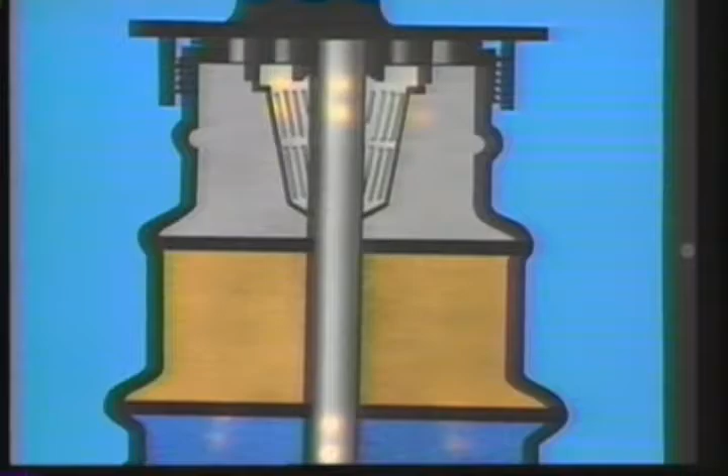Introducing Holy Water, the ultimate drinking water appliance. Holy Water is affordable, easy to install. This multimedia filter system is guaranteed for 6 years with no filter change.

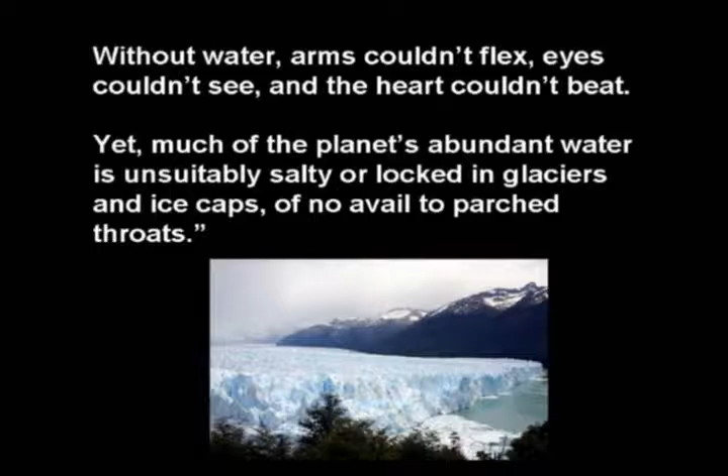In enacting the Safe Drinking Water Act in 1974, Congress envisioned a major overhaul of the nation's drinking water supply system. By all accounts, that vision has failed. The EPA ranks drinking water pollution as one of the top 4 environmental threats to health.

1 in 6 people drink water with excessive amounts of lead, a heavy metal that impairs children's IQ and attention span. In the early summer, half the rivers and streams in America's Corn Belt are laced with unhealthy levels of pesticides. Microbes in tap water may be responsible for 1 in 3 cases of all gastrointestinal illnesses. Ironically, even the chlorine widely used to disinfect water produces carcinogenic traces when combined with other common substances in water.

The ongoing problem of tainted drinking water is very disturbing. It is complicated by the varying standards and expectations of drinking water. The delicate ecosystem called Mother Earth contains a fixed amount of water, the very source of life itself.

So the next time you take a moment to drink a refreshing glass of water, keep this in mind. All of the water there ever was is still with us today. Water is alive, cycled and recycled in an incredible and never-ending self-cleaning process.

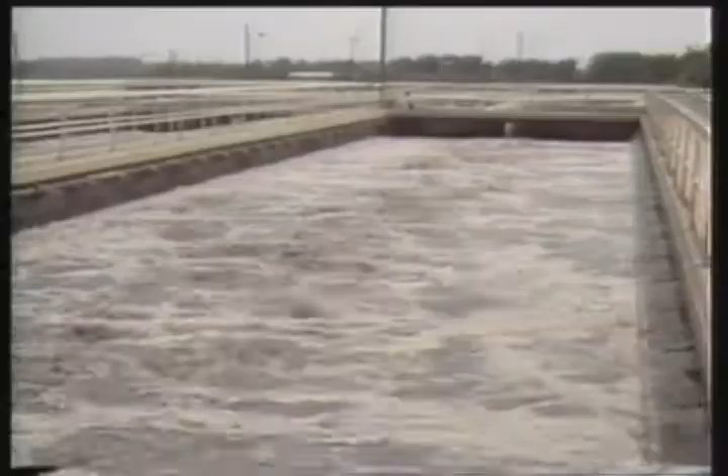A natural process which is now being stressed to unnatural limits due to increasing agricultural runoff, industrial pollutants, inadequate sewage treatment facilities, and deteriorating pipes and fittings.

First falling as rain, water circulates throughout the Earth's surface as rivers, streams, lakes, and oceans. Water flow generates electrical power and forms natural superhighways for transportation while functioning as the nation's collective sewage waste disposal system. Ultimately, some of that same water winds its way through water treatment plants and ends up in your home.

As potable tap water for drinking and food preparation. Unfortunately, the demands placed on water supplies keep going up, along with pollution levels, while tax funding needed to improve systems keeps going down.

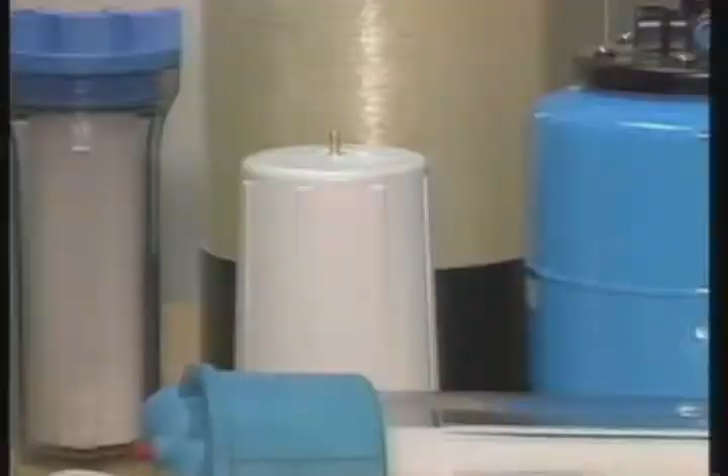In recent years, more and more families have become dependent on expensive and inconvenient bottled water to provide for their drinking and cooking needs. Many others, like yourself, have chosen to purchase and install some type of point-of-use treatment device.

So congratulations. With your purchase of the patent-pending Holy Water drinking water appliance, you have chosen the very latest innovation in point-of-use water filtration and purification. Holy Water was engineered to be the most effective, durable, and convenient drinking water treatment device available.

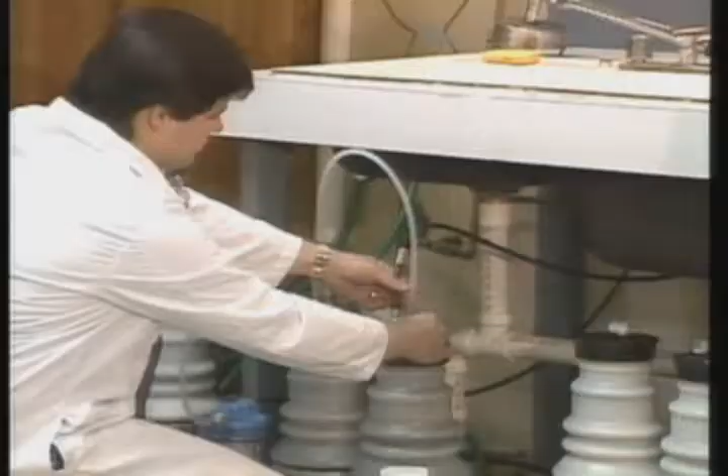There are no cumbersome filter cartridges or exotic membranes to change. The Holy Water appliance was laboratory tested for the removal of toxic chemicals and heavy metals, the removal of taste, odor, and chlorine, and the reduction of bacterial growth.

It will provide many years of sparkling clean drinking and cooking water on demand at your home tap. Your coffee, tea, powdered drinks, and juices will taste as they were meant to taste.

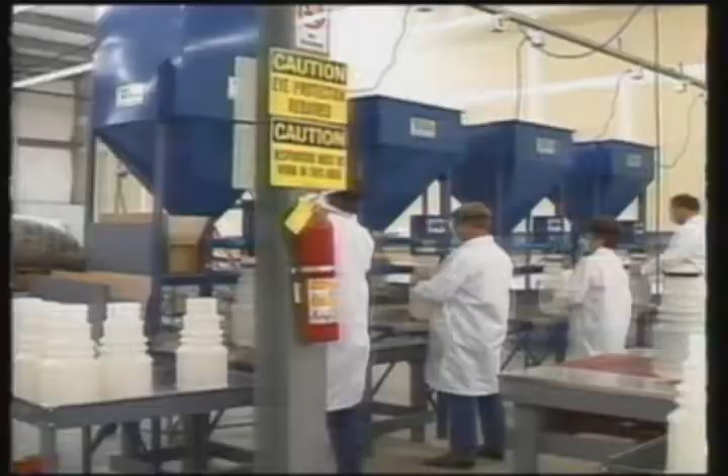The state-of-the-art Holy Water appliance is manufactured using only FDA food-grade materials. It features a unique multimedia layered treatment technology. Here's how it works.

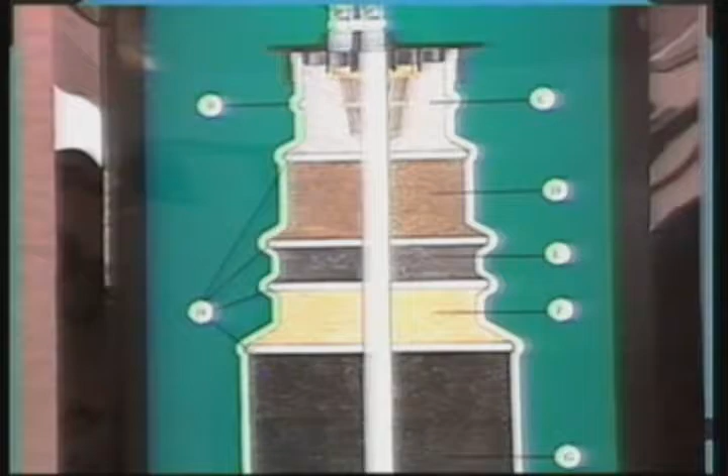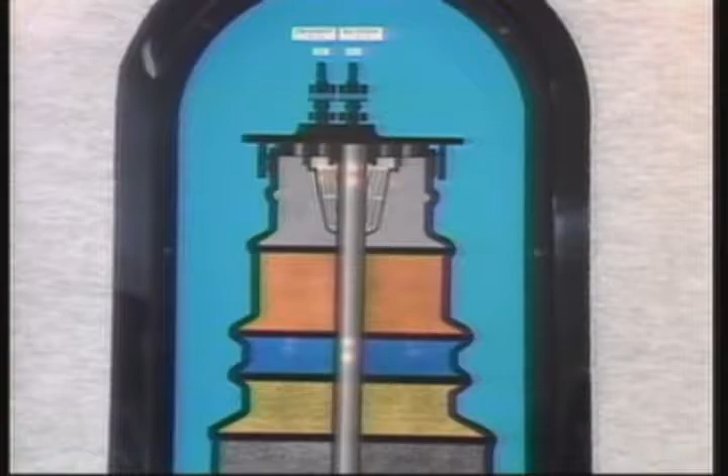Untreated tap water enters the unit at the top and filters downward through 5 distinct treatment beds at a controlled flow rate of 1 gallon per minute to ensure adequate contact time. The water is filtered and purified naturally, much as it is in the multi-layered earth.

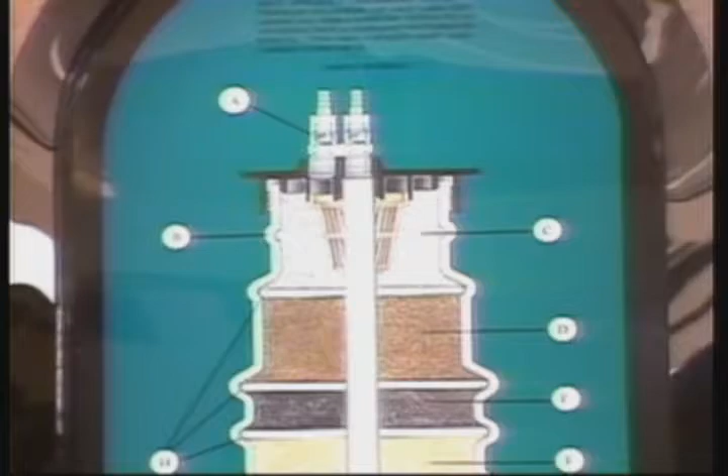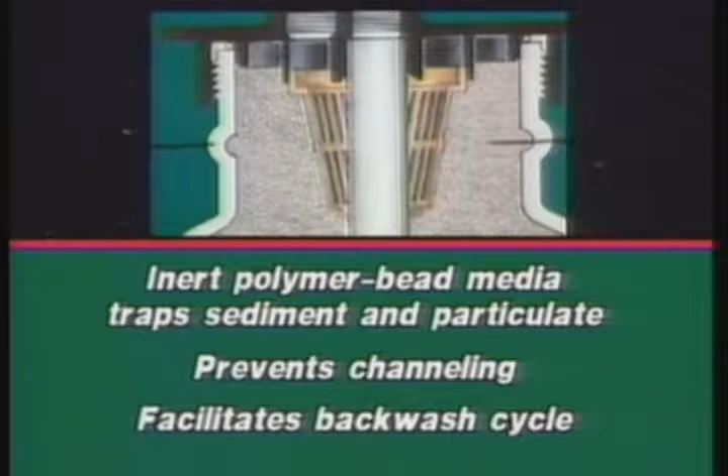The Stage 1 filter bed is made up of floating inert polymer beads, which trap pipe sediment and other particulate, then suspends them until the backwash cycle rinses them down the drain. The beads also help prevent channeling by evenly dispersing the water flow.

The second stage, using a highly pure copper-zinc alloy media, dechlorinates the water by a reduction oxidation process while reducing lead, mercury, and other heavy metals through an electromotive force reaction. This creates an environment hostile to bacteria growth.

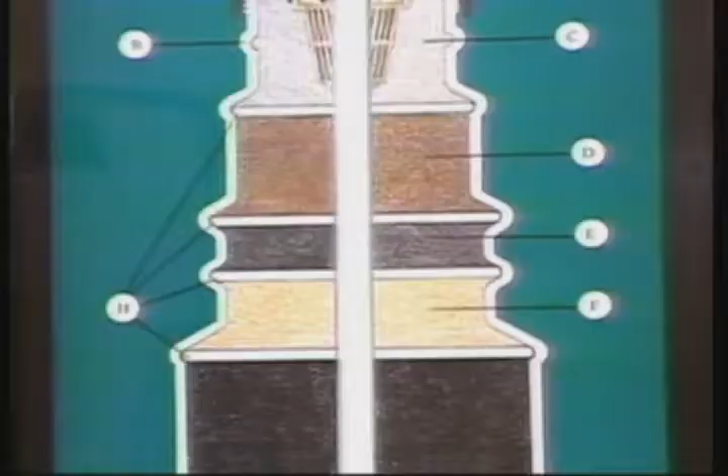In Stage 3, a layer of naturally mined manganese dioxide reduces turbidity and traps traces of sulfur, iron, and manganese.

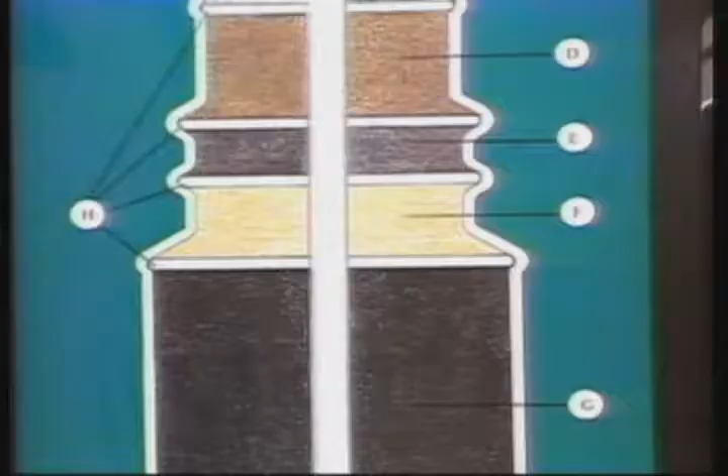Stage 4 is a media bed layer of strong base anion exchange resin which scavenges trace amounts of nitrates, nitrites, and color from your water.

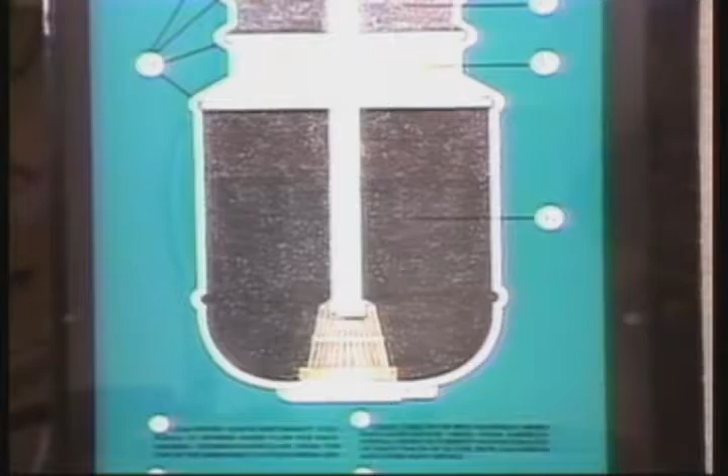The fifth and final media bed contains over 5 pounds of highest grade packed coconut shell carbon. This final filtering process polishes off the water and removes volatile organic compounds, trihalomethanes, taste, odor, particulate, and any residual chlorine.

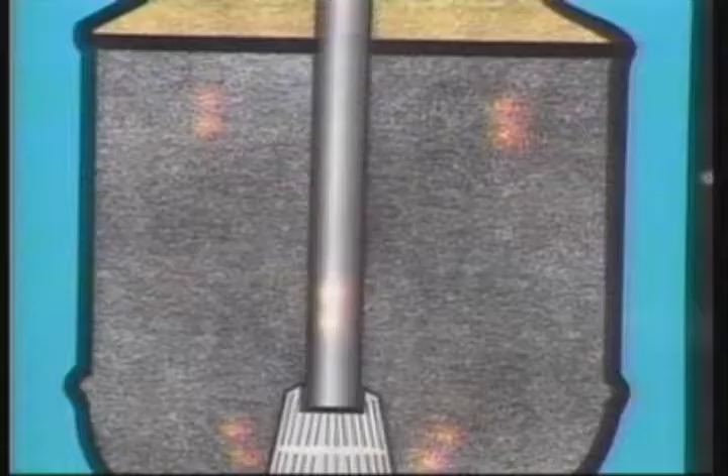Now, fully treated, decontaminated, and dechlorinated drinking water passes up the riser tube to be dispensed on demand through the drinking water station. All of this for less than a penny per gallon.

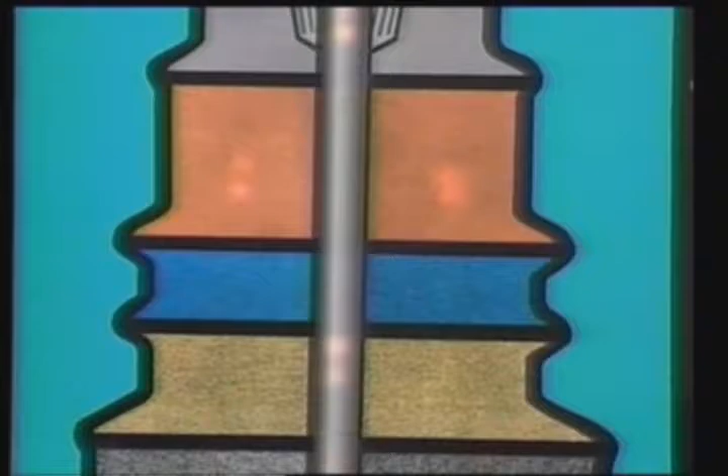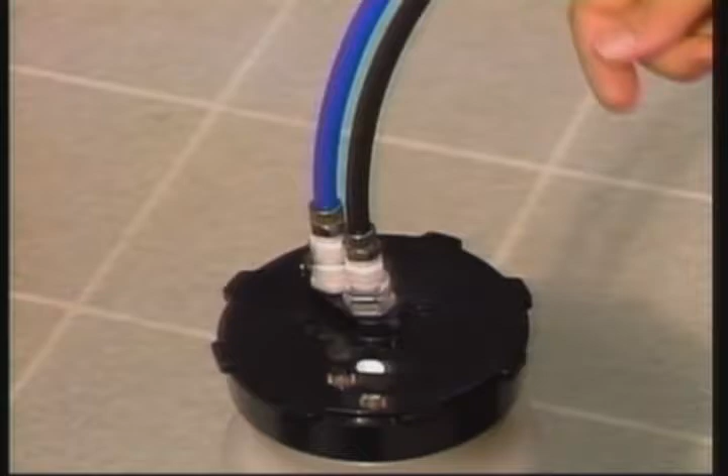Like no other in the world, the WHOLLY water appliance features a backwash cycle which instantly reverses water flow simply by alternating the leak-free quick disconnect couplings. This self-cleaning feature cleanses the system, forcing trapped pipe sediment and particulate down the drain, not into your drinking water.

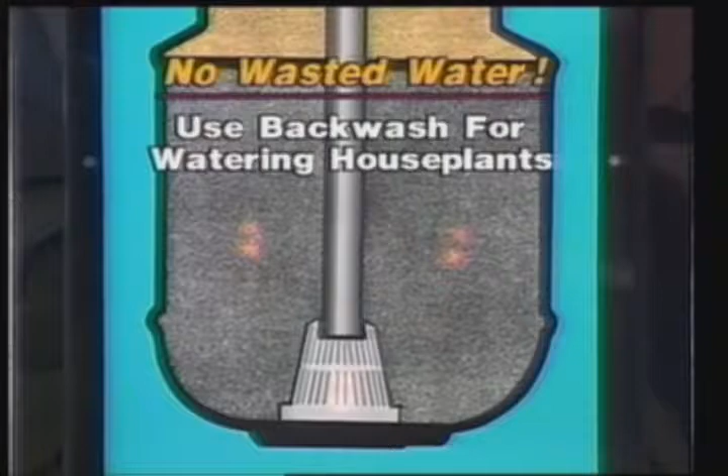The unit should be backwashed every 3 months as a rule, or as often as you wish, depending on the quality of your water. An alternative to expensive and service-intensive reverse osmosis and distillation systems, WHOLLY water removes or significantly reduces all EPA-regulated chemical toxins, chlorine, taste, and odor. Naturally occurring nutritional minerals are left in your water.

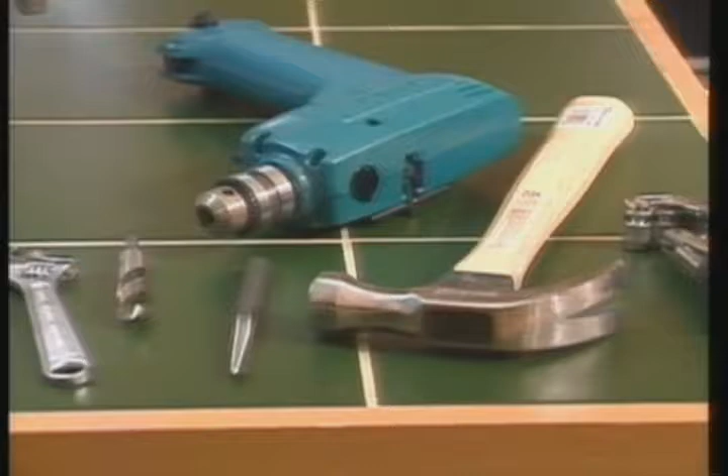All of the components you'll need to complete the installation are included in the box. You'll need a few tools to get started: a copper tube cutter, a hammer and a pointed punch, an electric drill, a 7/16 inch carbide-tipped masonry drill bit, and a couple of small 8-inch adjustable wrenches.

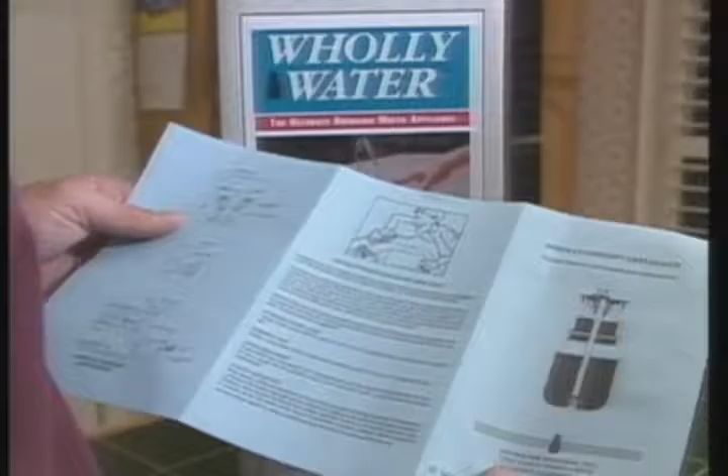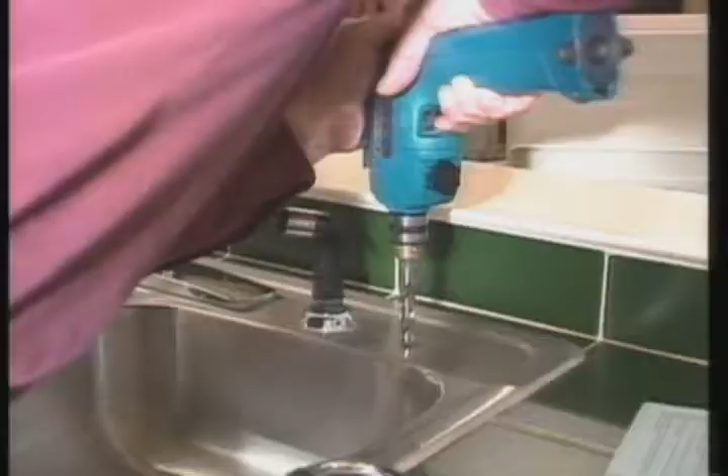Now you are ready to begin. Following the instructions in your printed owner's manual, install the long-reach water faucet as shown on the back page of the manual. First, make a starter indention on the surface with a sharp punch, just enough for the drill bit to take hold. Maintain firm downward pressure on the drill as you complete the drilling process.

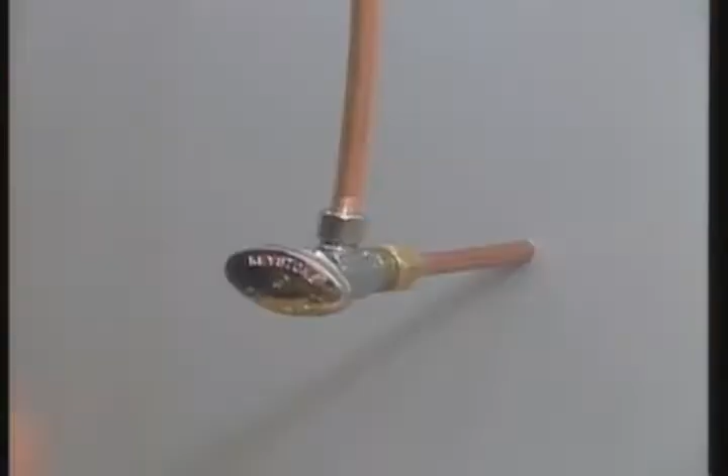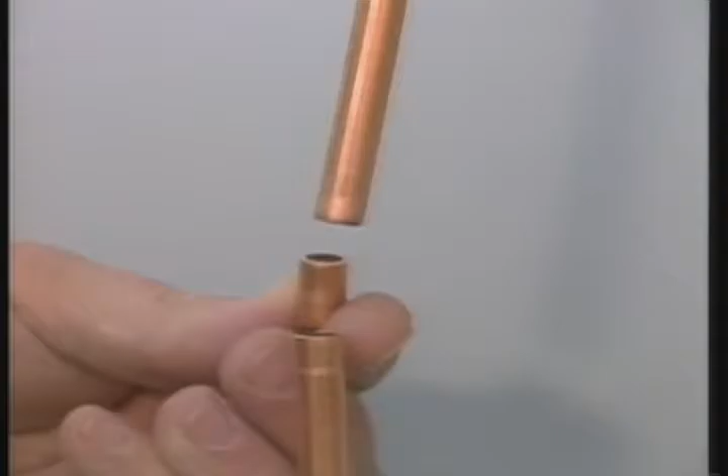This must be accurate since the T fits in this space. Attach the T to the line closest to the shutoff first. This will make the completion of the T installation easier.

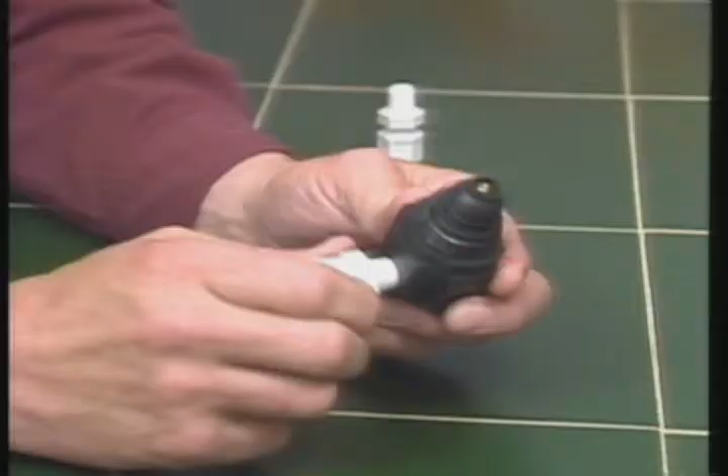Next, pre-assemble the pressure regulator onto the inlet line as follows. Thread in and snug the male compression connectors into the inlet and outlet ports of the pressure regulator. Be sure to use the Teflon tape provided.

Then cut your black inlet tubing to the desired lengths. Make sure to place the plastic insert inside the tube. Attach one piece of the black tubing to the inlet side of the pressure regulator. Attach the other piece to the outlet side.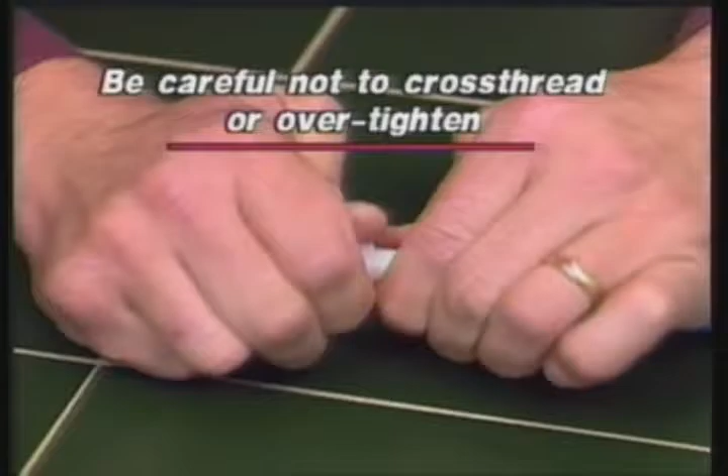Next, attach one backwash insert to the end of the black tube coming from the regulator. This is the water inlet tube. The backwash insert has a compression type fitting. Attach the other backwash insert to either end of the blue tubing. This is the water outlet tube. Be careful not to over-tighten the fitting.

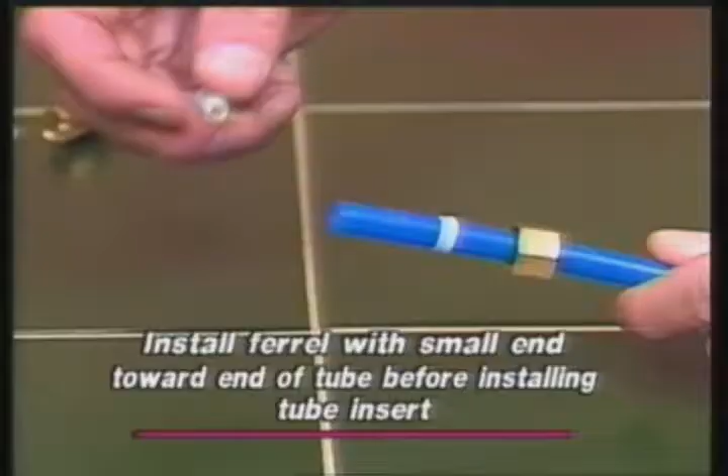Before attaching the black inlet tube to the compression tee, make sure the plastic compression sleeve or ferrule is on the tube and the plastic insert is placed inside the tube. The small end of the ferrule is positioned closest to the end of the tube. Attach the blue outlet tube to the faucet with another compression fitting.

Before completing your installation, turn the cold water on to check for leaks. If you discover a leak, tighten the fitting very slightly until any leakage disappears.

Your unit must be backwashed for 10 minutes prior to use. Lock your faucet handle on in the up position. This will minimize water splattering when the water displaces air in the unit.

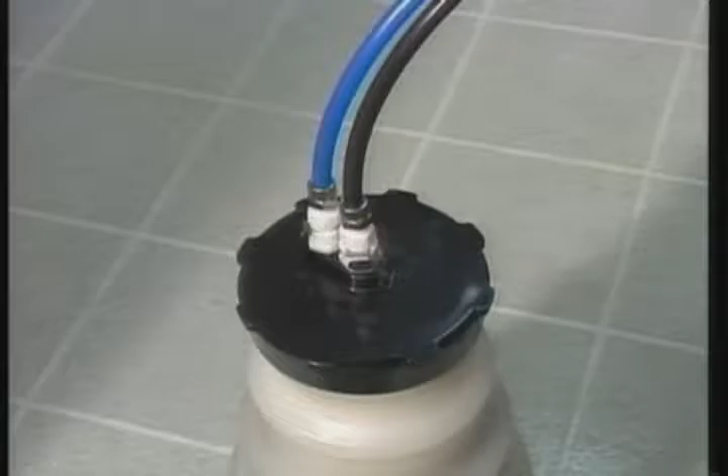Plug the insert on the blue tubing from the faucet into the in coupling on the top of the tank. Plug the insert end of the black tubing into the out coupling on the top of the tank. Let your water run in the break-in backwash cycle for 10 minutes. At first, your water will sputter and run dark for a few seconds as carbon fines are released from the media bed.

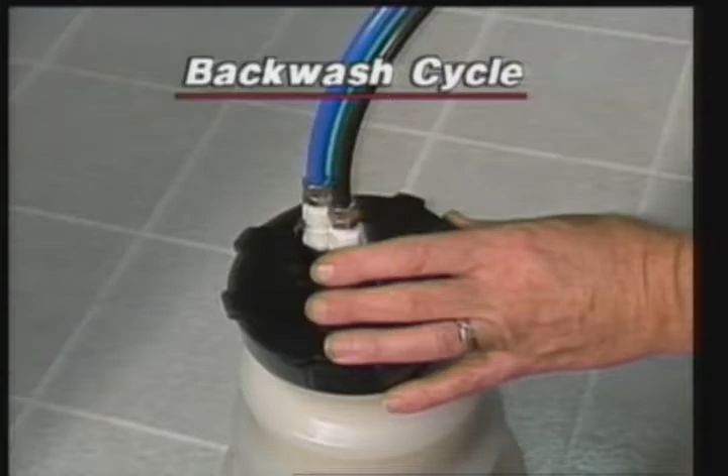After backwashing for 10 minutes, switch the lines back to the regular filtering cycle. Black to in and blue to out. Let the unit run for another 5 minutes to reset the media beds and flush the lines.

Keep in mind that your WHOLLY water unit is a heavy-duty appliance. It contains nearly 12 pounds of filtering media. Accordingly, there will be a considerable amount of air bubbles generated as air in the dry media beds is replaced by water. This harmless, bubbly effervescence will cease within a few days of regular use.

You are now ready to enjoy many years of delicious, sparkling clean, and better than bottled drinking and cooking water on demand without any filter or membrane changes or expensive service calls. Thank you for choosing WHOLLY Water, the ultimate drinking water appliance.